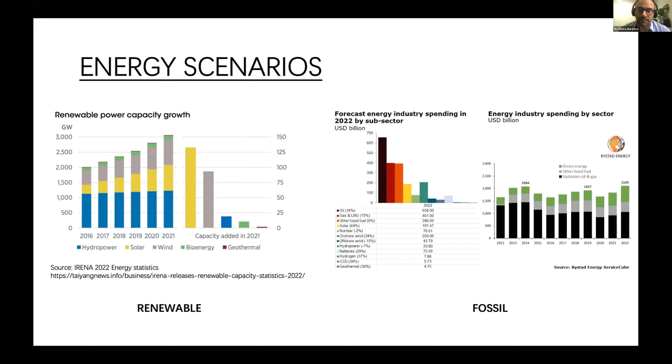And for this reason, carbon capture and storage could be a good solution to allow us to transition to new energy sources, while keeping some of the plants that we have. As we will see in the first case study that I will present, natural gas combined cycle plants in Italy are a big reality. They are responsible for the production of a great part of the energy at the moment in Italy. I think it's difficult to replace this in a very short time.

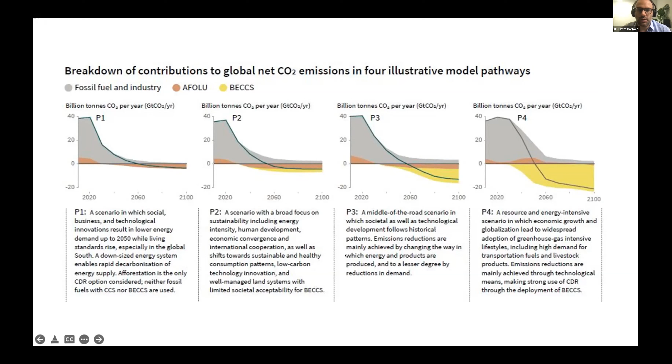Together with carbon capture and storage, we introduce also the topic of carbon negative technologies. Bioenergy with carbon capture and storage, in fact, is a carbon negative technology. It is highlighted and promoted also by the IPCC reports. The main advantage of this technology is that it could allow us to use current technologies working with fossil fuels and achieve the net carbon emissions targets, which have been pledged by many countries.

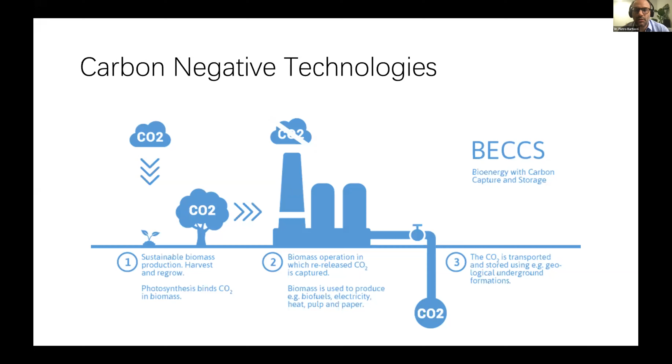So bioenergy with carbon capture and storage is a form of carbon negative technology; we have many other different ones. It is mainly based on the absorption of CO2 by biomass during the photosynthesis process. And when biomass or biofuels in general, after a step of conversion, are converted into energy mainly by combustion in thermochemical power plants, we can store CO2 in the ground, achieving net negative emissions. So this is the main concept of the technology.

As I said before, developing this carbon negative combustor, which I will show, we have to start with some activities which we developed at the University of Perugia in Italy with Baker Hughes. Baker Hughes has a quite big production site in Florence, Italy, where they produce turbines with capacities of 12 megawatts and 16 megawatts, for example, which we think are more suitable for bioenergy, because, as you know, biomass is dispersed in the territory, so we cannot make very big power plants with biomass, but we have to focus more on decentralized power plants.

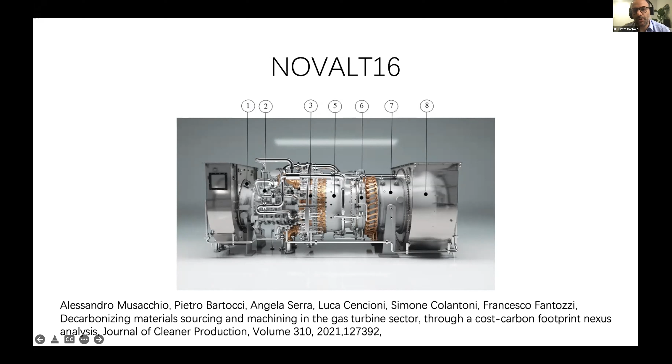So with Baker Hughes, we were responsible for tracing all the carbon emissions in the production of the raw materials used for gas turbine production, which are mainly different alloys of steel and different materials. And together with the company, we started analyzing what happens, because this is a multinational company with a big supply chain. So what happens if the supplier of raw materials like steel is a developing country? And what happens if it is a country with a low carbon footprint of the energy mix, for example electricity or heat produced with less emissions?

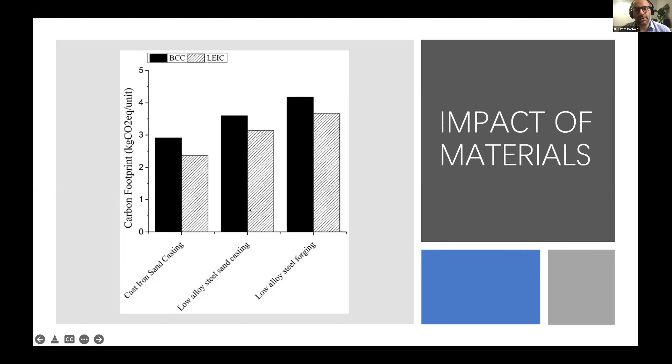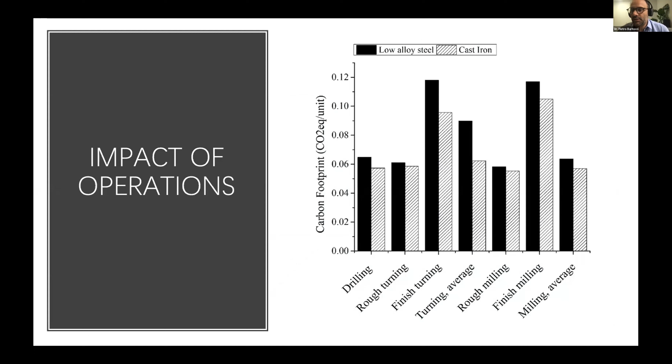Here in white, we see the emissions correlated with steel production if it's done in Europe, for example. And the black one could be developing countries like China and India. The company wanted to know more or less the carbon footprint of all the raw materials. Then we developed the carbon footprint for all the operations happening in the plant of Florence. And at the end, we obtained the different carbon footprints of the different components of the gas turbine. This allowed the company to certify the carbon footprint of the production of 2 models of gas turbines.

Here we have to explain better some aspects. First of all, the carbon footprint of a gas turbine is not focused on production. Production is a small portion of the total gas turbine carbon footprint. The biggest proportion is the burning of the fuel. So it's the new fuel that we have to produce. And as we know, the gas turbine sector is mainly shifting to hydrogen for achieving net carbon emissions. The technology we propose will have to compete on the market with hydrogen, for example,

and also oxy-fuel combustion, because there are trends now that say that if green hydrogen is produced massively with green electricity and electrolyzers, then we will have a huge flow of oxygen as a byproduct of hydrogen production. So this oxygen could be used in oxy-fuel combustion.

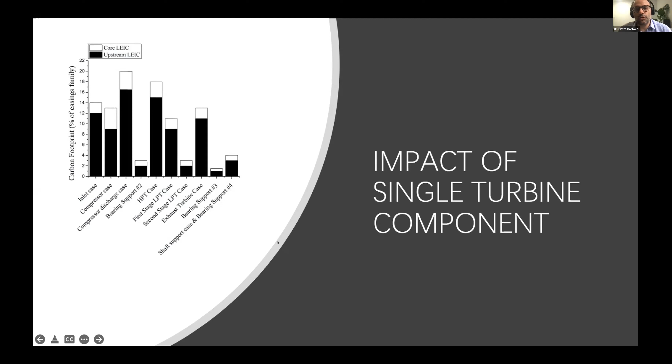So we are well aware that the technology we propose should fight to find a niche in the energy transition market where other technologies are also developing. We are also aware that the decarbonization of the oil and gas industry is passing for sure through the use of LCA. For example, other companies like Siemens Energy are adopting it on a large scale. So we think that this work could lead to good results also in the selection of the most interesting technologies.

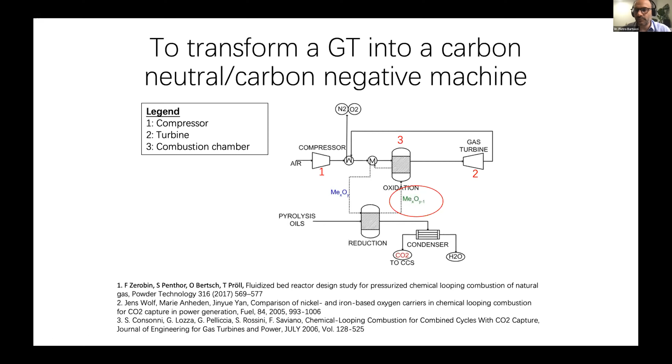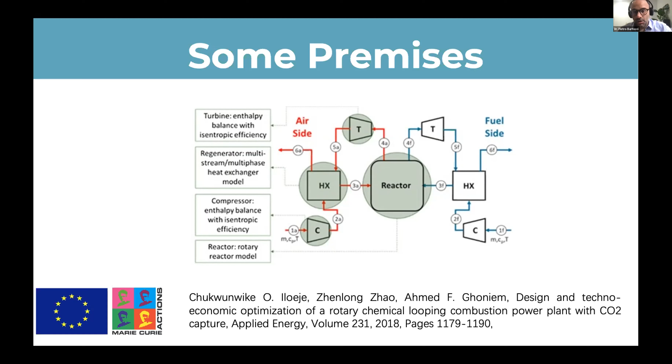So here, for example, is the scheme which was firstly proposed by Dr. Wolf and Dr. Yan. And we know there is some ongoing research also at the MIT. Given that this conference is at the MIT, I thought it was interesting to show the 2018 publication in Applied Energy proposing a similar technology. In the case of the MIT, a rotating reactor was proposed. From the point of view of the chemical looping combustor, it was more compact, and maybe it could reduce the investment costs. So why is there need of another project?

These technologies have some technical barriers that have to be overcome. For sure, we need more efficient oxygen carriers. As we will see, the oxygen carrier is what transports the oxygen from air to the fuel for the oxidation. And there is much research ongoing on this, also testing molecular dynamics and all the mechanisms possible to optimize its working conditions. Also, the oxygen carriers need to have low attrition. During the process, which is happening in most cases in fluidized bed reactors, we don't want the oxygen carrier to produce dust, also because it is very probable that we will find this dust in the gas turbine, and this is barrier number 4, I think.

Then, from my point of view, the most important barrier is that if we need a chemical looping combustor to be coupled to a gas turbine, we need to operate the combustor at high pressure, let's say from 10 bars, 12 bars, and high temperature, maybe 1200 degrees. And here we have issues both with the material of the reactor, which we will see after a few slides, but also with the oxygen carrier, because if we use copper, for example, we know that this copper could give agglomeration inside the fluidized bed.

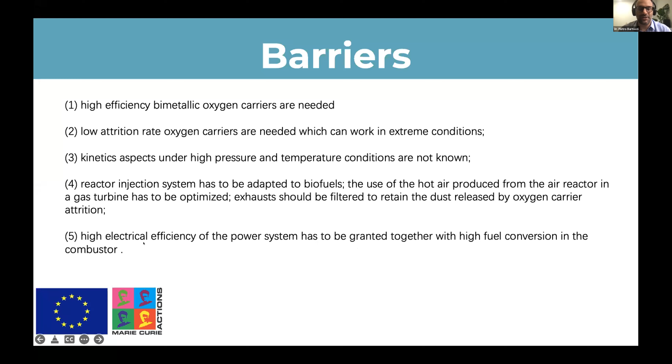Then the major problem is electrical efficiency, but we can maybe discuss this after the presentation, because electrical efficiency is very important for fossil fuels, because we have to spare them. But if we do a carbon negative technology, this means that the more fuel we use, the more CO2 we have absorbed from the atmosphere during photosynthesis. So we can discuss the importance of the efficiency. Maybe this could be balanced by the importance of the return on investment, let's say.

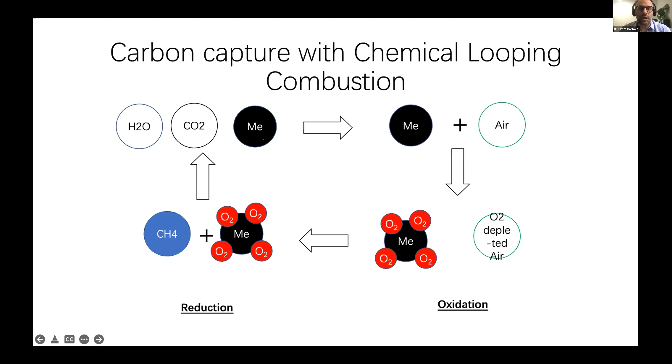So coming to chemical looping combustion, this is a combustion which does not use air. It uses a metal oxide, which provides oxygen to oxidize the fuel. And so it produces a pure flow of CO2 and water, which are the products of combustion, without the nitrogen coming from air. And so we can separate CO2 from water by water condensation and have a pure flow of CO2, which can be captured at very low cost.

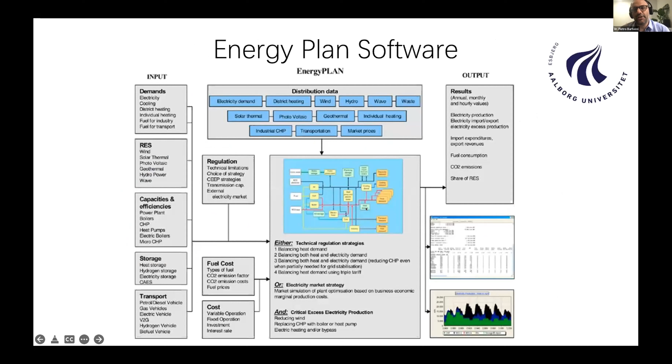So first of all, we made an analysis before presenting the project based on Italian energy scenarios. I said that Italy is deeply focused on combined cycles. And we have some national energy strategies which propose an increase of renewable energy, but show that these natural gas plants will remain, I think, for at least the next 10, 15 years. So we have made different scenarios using EnergyPLAN software developed by Aalborg University. The energy scenarios were validated on the targets of the Italian energy policy up to 2030. Obviously, this changes quickly. The policy documents are from before the Green Deal, so maybe this will change a little, also depending on geopolitical issues about natural gas supply.

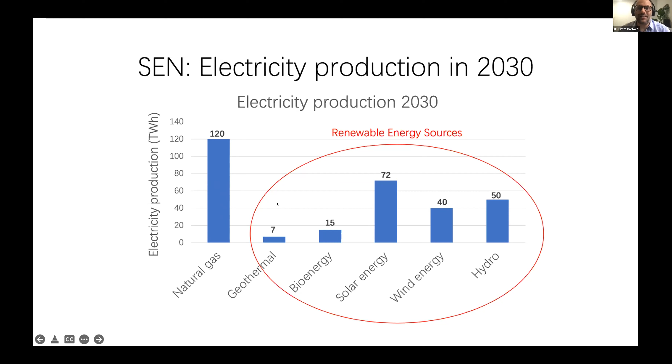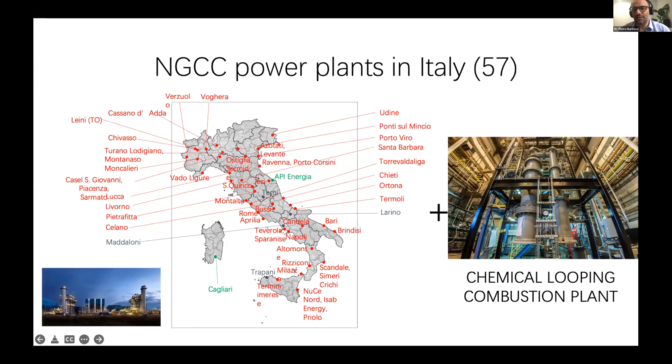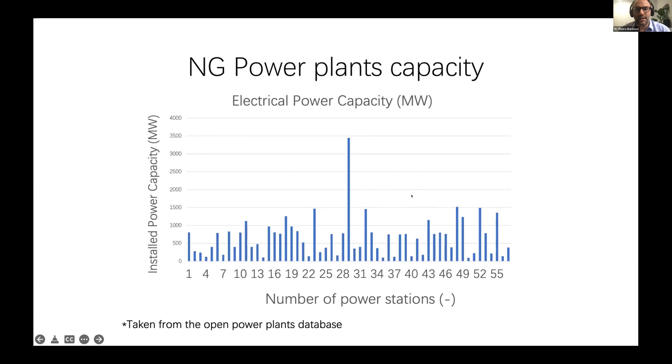But it's very probable that our natural gas power plants will still be quite important. These are our 57 natural gas plants, all in Italy. And our first feasibility study wanted to know what happens if these plants are substituted with a combustor, only the combustion part, which is a chemical looping combustor. This is an example of the combustor, the one developed by the National Energy Technology Laboratory. So these are the power capacities of the combined cycle plants in Italy. And this is the electricity generation.

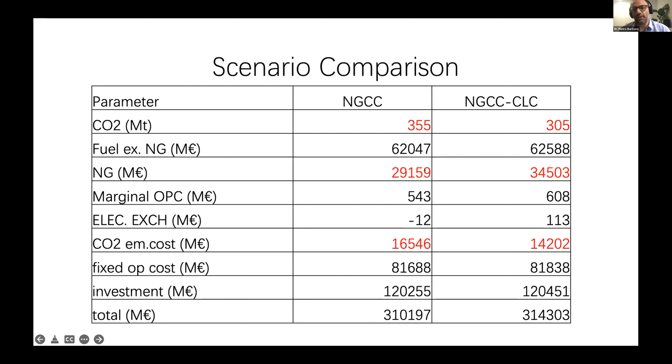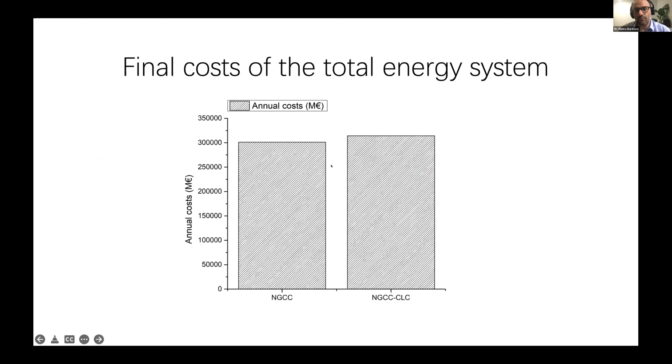What we calculated mainly is how much the CO2 emissions can be reduced and how much it could cost, how much would be the investment to upgrade our current energy system. And you see that the total investment, even if we speak obviously about millions of euros, is not so high if we compare to the existing energy system now.

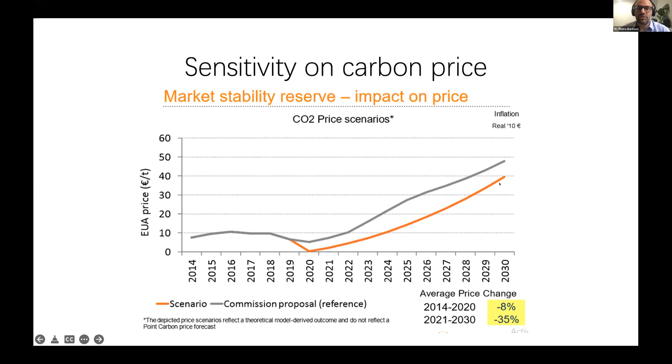Obviously, this depends on the carbon price. These were estimates for 2030 that said we would arrive at 50 euros per ton, but we are already at almost double. So if we consider the carbon credit value, the business as usual, which is orange, could be very similar as an expense in investment and operating costs compared to the new proposed scenario.

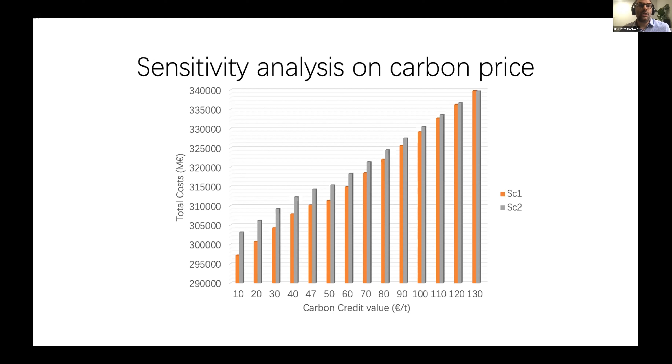This is to say that instead of changing completely the energy mix of Italy, introducing massive renewable energy, we can upgrade our natural gas plants in a way that they are carbon neutral. If we use biomass or some fuels, mainly biofuels, this technology can be even carbon negative.

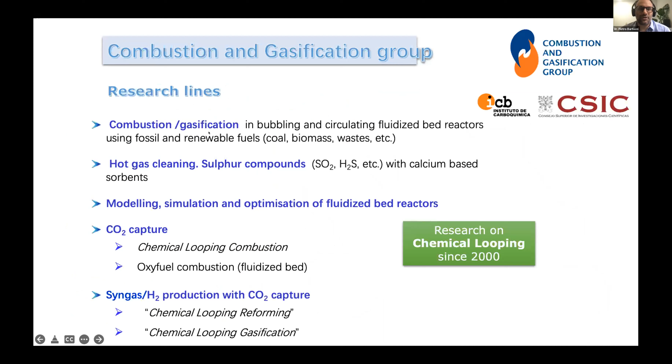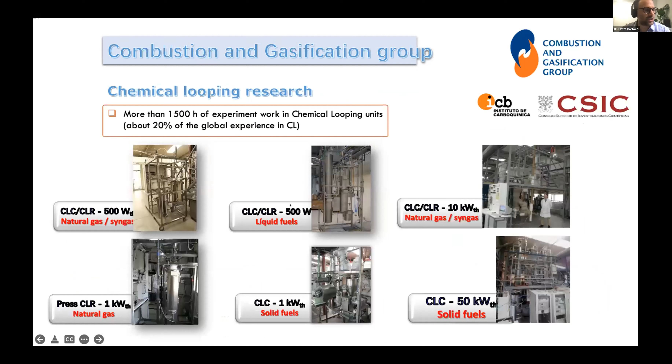So to develop this combustor, I went to Spain. Here is Zaragoza. Our center is mainly focused on combustion and gasification. We prepare the oxygen carrier, we test it in plants, and we do scaling and optimization. These are the batch reactor and the continuous reactor that we have. The plant I already explained. The project is based on the preparation and characterization of the oxygen carrier, batch tests, modeling, and continuous pilot tests.

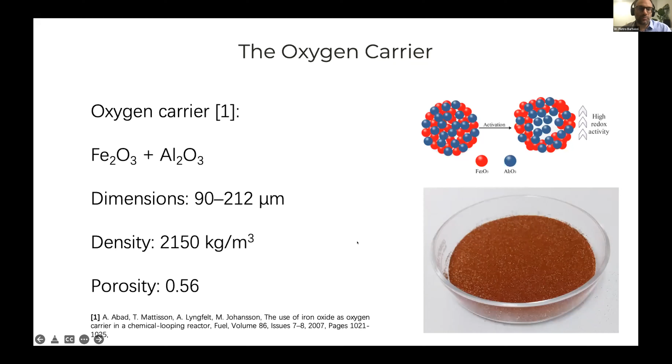So compared to the literature, which was mostly focused on Aspen theoretical studies, we do proper modeling and an experimental campaign to see if this technology can work at high pressure and high temperature. Chemical looping combustors working at high pressure are very few at the moment. There is only one project in Canada working on such a combustor, and another project in Norway. So we want to bring more data from a scientific point of view.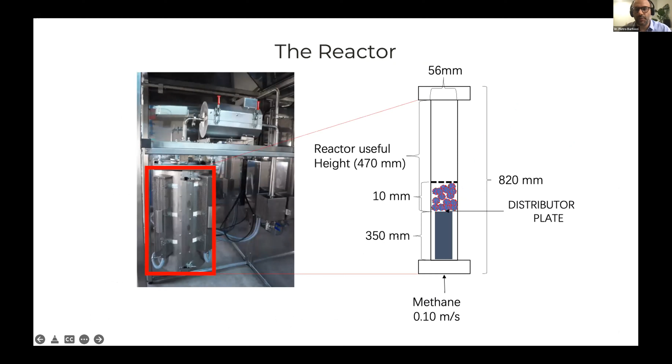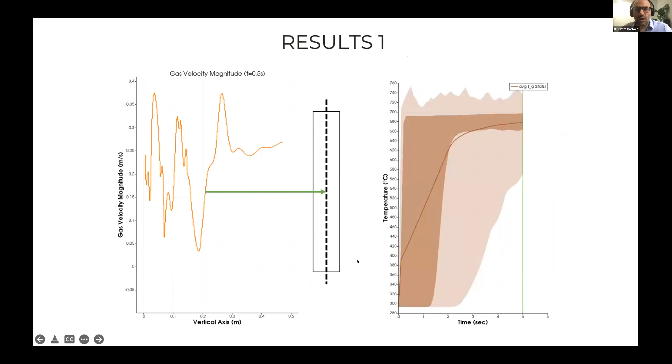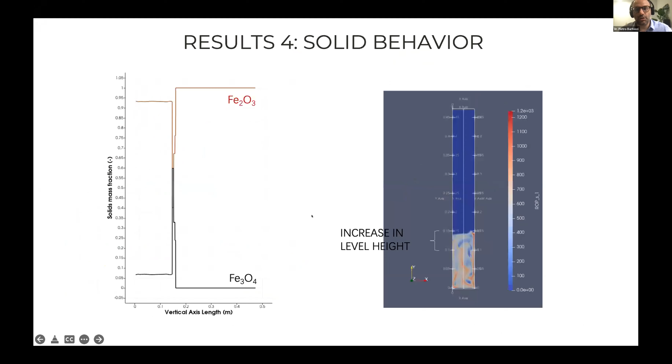These are the models we are developing with the MFIX software developed by the National Energy Technology Laboratory at Morgantown, and the NETL is part of the DOE. And this is the modeling platform with the kinetics, which is done in pressurized conditions with the PTGA. And these are some results: the production of gases, how the reactor works, and how the oxygen carrier is converted.

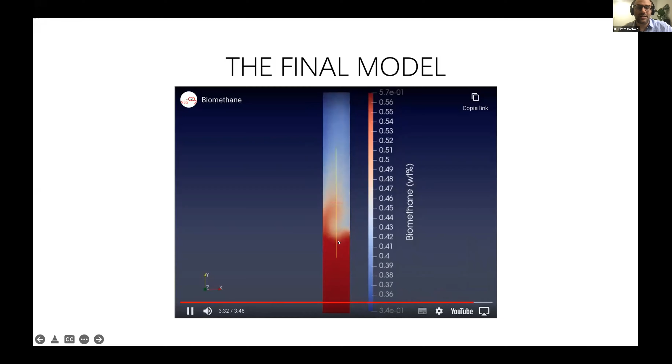The most important result maybe is to see more or less how the process works. This is biomethane coming inside the reactor, and we see how it turns directly into CO2 and water. What we can see is that at 3 minutes and more or less 20 seconds, the reaction path changes completely. So what we are now doing is to analyze one cycle of reduction, to know how long it lasts, and to fully validate our kinetics scheme.

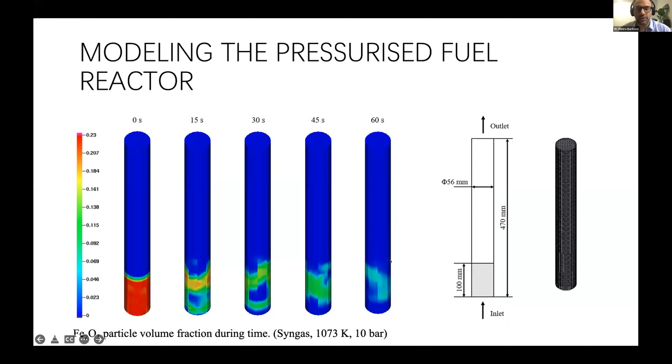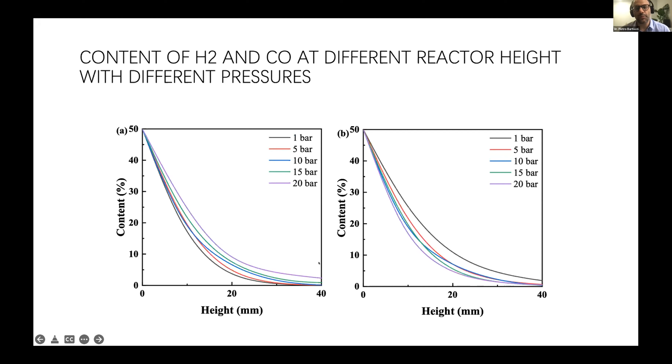The simulation was also done with Huazhong University of Science and Technology. This is our last work, which was presented at the International Applied Energy Conference 2021. We validated the model with syngas at pressurized conditions. So what happens is that in the reactor we have hydrogen and CO, which are contained in the syngas, that decrease because they react at different pressures. And this was also analyzed at different temperatures.

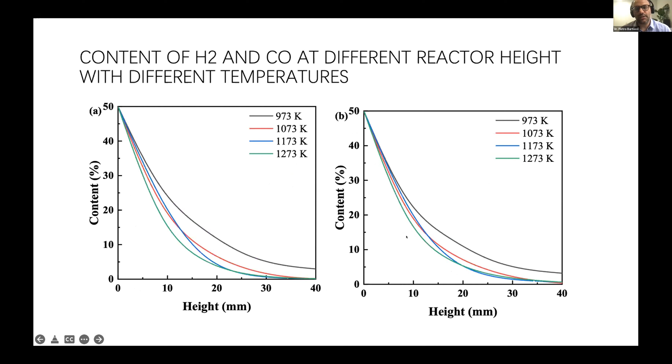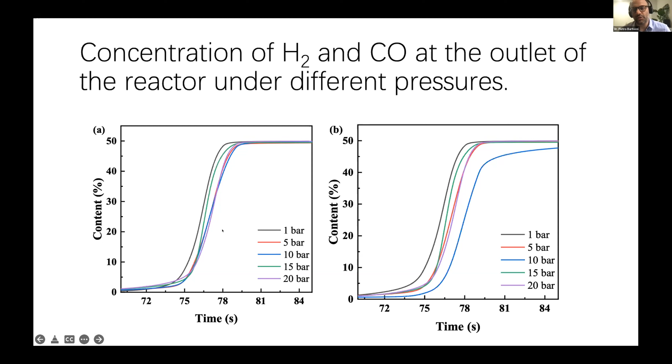Here, over time, we see that the fuel doesn't react anymore. So also in this case, we analyzed the cycle of reduction and how much time is needed to have the oxygen carrier exhausted. It is spent.

Our final conclusion on the pressurized model of a batch reactor is that, as was already analyzed by pressurized TGA tests, the hydrogen reaction in the syngas is very quick. The CO is mostly influenced by the pressure, and for hydrogen we have a pressure of 15 bars where the kinetics seems to slow a bit. In principle, we can say that syngas behaves as the sum of the kinetics of carbon monoxide and hydrogen.

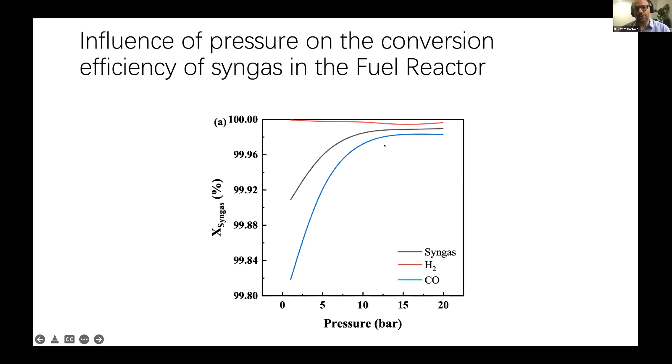From this data, we have calculated the solids inventory necessary for our fuel reactor, which is a batch reactor, a fluidized bed. And we discovered the opposite trend of what we expected. We expected an opposite trend because the effect of pressure on the kinetics is mainly slowing the reaction. So if we increase pressure, the kinetics gets slower.

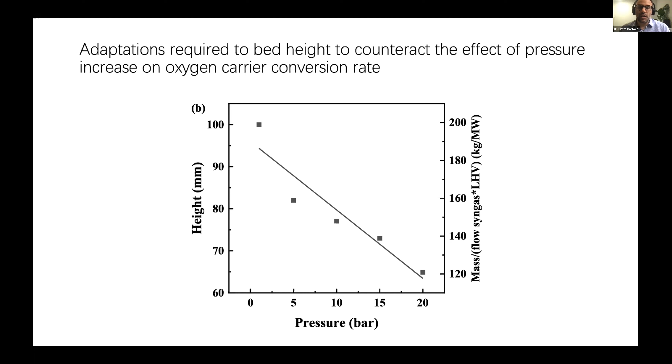This is what was seen by pressurized TGA tests, while in this case, when we also consider the effect of pressure on the fluidization of the bed, we see an effect which improves heat exchange, and the heat exchange also affects the reaction itself. So it balances the kinetics, which is slow. This is at least what we saw from these models, and we are going to further analyze this on an experimental scale.

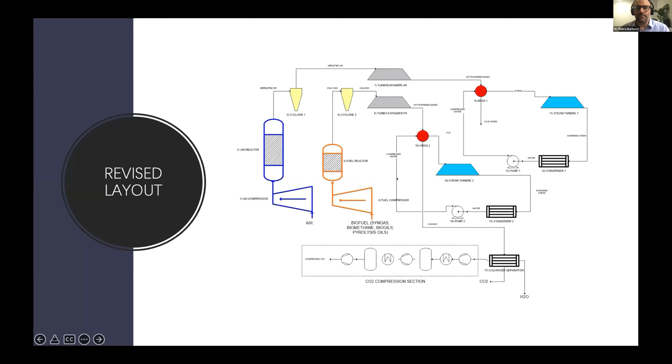This is the final plant that we want to propose, which is quite similar to the previous one. And we are optimizing it with different software platforms, so not only Aspen, but also CFD modeling. And what we tried to develop is a procedure to design such a combustor. While these combustors are usually designed based on the primary energy, so the power of the combustor, in this case we have shifted our interest to the gas turbine.

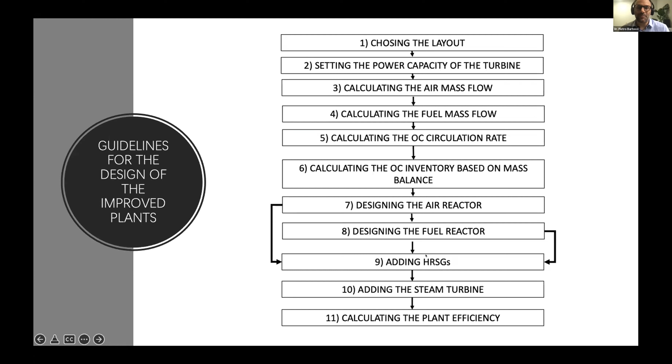So we first choose a gas turbine, then we calculate the air mass flow that should pass into our combustor, and we calculate the fuel mass flow based on stoichiometric combustion chemistry. We calculated the oxygen carrier circulation rate, and so on. We slowly design all the plant. This is a completely new methodology.

And we have also noticed that to optimize all the plant, a key parameter is the excess air in the air reactor. If we increase this, for example, from 1.2 alpha to 3 times excess air, we have two positive effects. One is that the excess air is going to cool the air reactor and provide the optimal temperature. The other is that we can maximize the power production at the turbine and reduce the use of fuel. So this is how we will make it.

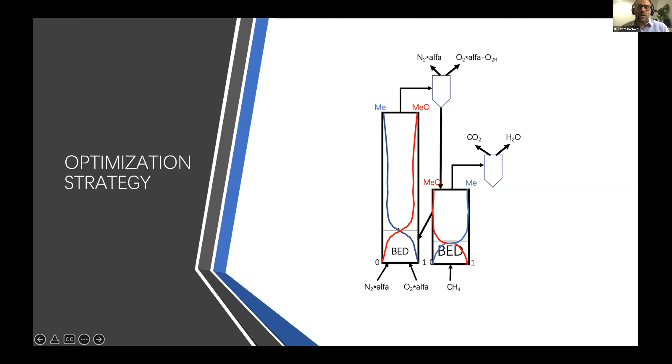So our Aspen optimization is mainly based on two equations, at the air reactor and at the fuel reactor. Obviously, these are connected, so the heat for the fuel reactor, which has endothermic reactions, will be provided by the air reactor. So these two terms, we can make them equal. And in this way, we have only one variable to optimize, which is the excess air, as I already said.

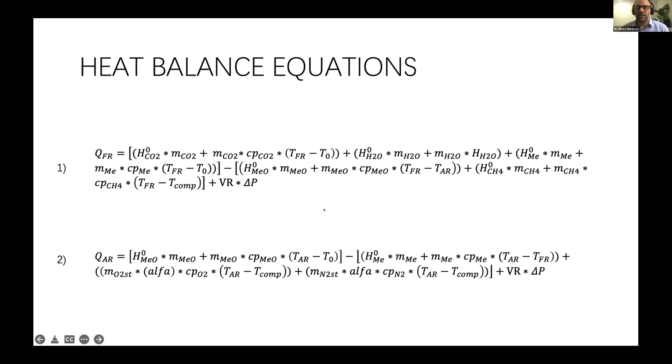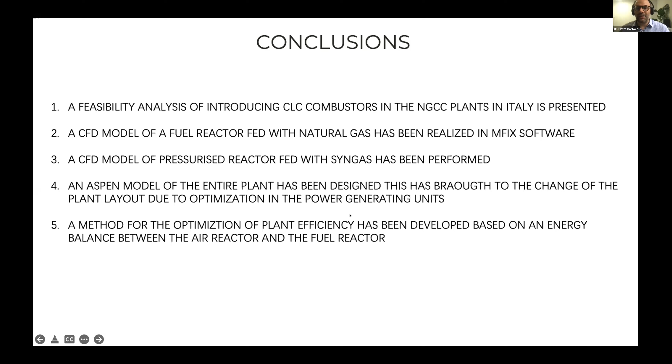These are shortly the conclusions: mainly natural gas or biomethane has been tested in a model, syngas also, and the behavior at pressurized conditions has been analyzed. In both cases, the kinetics was done already in TGA. I did not present the experiments for clearness, to be clear and short. And we developed a methodology to clarify how to design such kinds of plants.

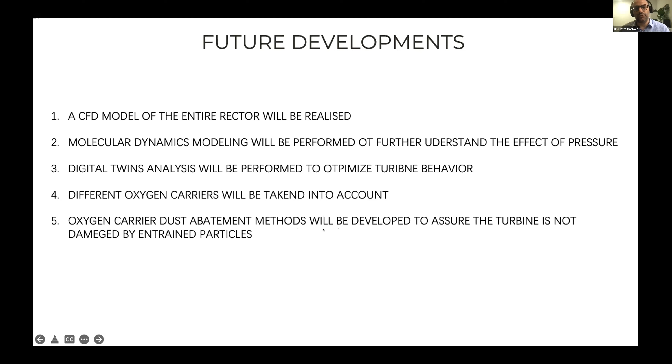Surely the next future development will be economic analysis, because as I said, we have to compete with different technologies, which are mainly taking the spotlight. But we believe that this technology on bioenergy can be used on a small scale. So small scale could be our niche, and we believe we will find our place in a small scale.